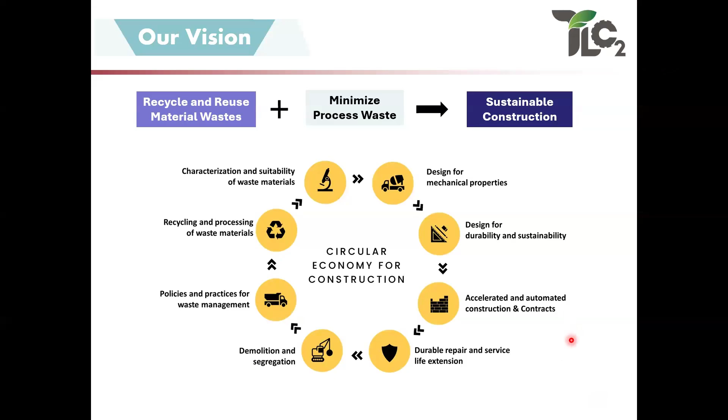How do we- my computer stopped working. Do you see my screen? Yes, but my screen became blank. Show mode. Can you see now? Yes. Hello? Yes, yes, okay. Yes, we can see now.

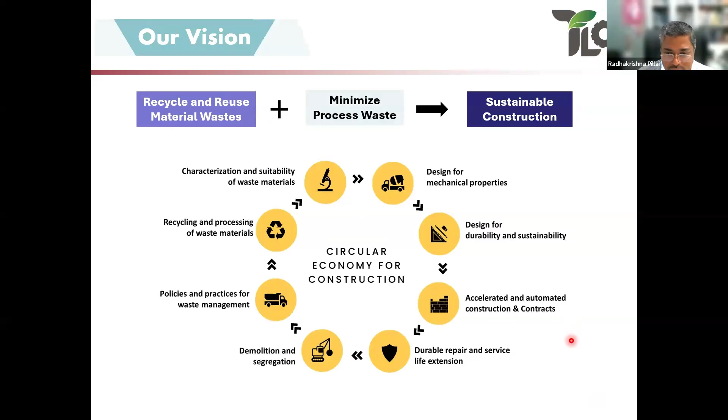Now for today, I just want to brief you on what our Center of Excellence on TLC2 does. We work on materials and management aspects. Today's topic is mainly on looking at how do we build durable concrete structures, or rather, how do we control corrosion in concrete structures.

So I'll be talking about the materials aspect. How do we choose a particular material which will help you in building long-lasting structures? And we will then talk about cover concrete and its properties - what are the key factors which make us worry about cover concrete? And then a concept called Mx-Dy concrete I will talk about.

And then how do we make sure that the water which we use for concreting is good, because that also plays a significant role. And then finally, if time allows, I'll talk about galvanic cathodic protection. So this is the outline for today's talk.

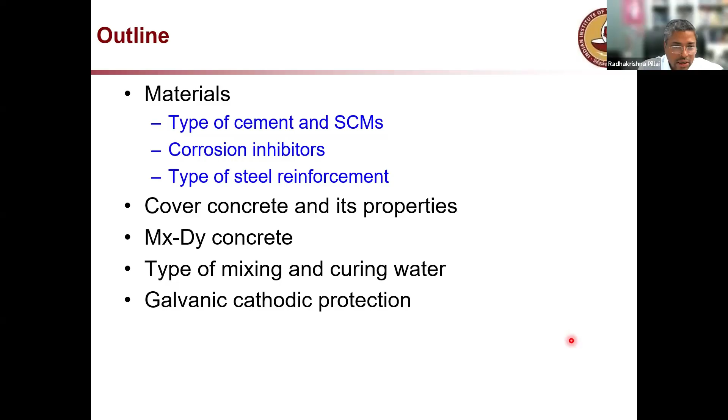Most often we worry a lot about corrosion in concrete structures, mainly because it costs us a lot, and it also makes the structure unsafe after some significant amount of corrosion has happened. So this is something we all are worried about. How much does it really cost? It's about 3 to 5% of the gross domestic product is what the cost of corrosion is estimated to be. Now, out of this, I can confidently say about 50% is because of the deterioration or corrosion of concrete structures.

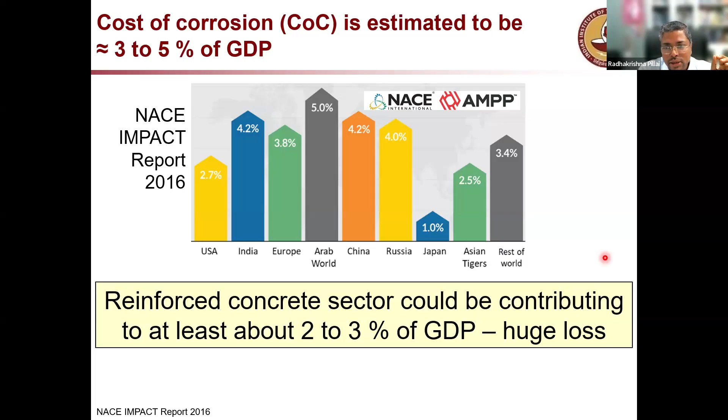Concrete infrastructure plays a significant role, contributing significantly to this cost of corrosion. Now if you look at this graph here, you can see in some places it's more or less around 4%. That is something we have to worry about. And if we can divert or use this money for good construction, it will be really, really helpful. So our objective is to reduce this cost of corrosion to the maximum or minimum level possible, so that we can use that money for other things.

Now, one thing I would like to mention is the importance to be given to material science, or the construction materials aspect, and the construction process or construction technology aspect. Today's lecture will be more on the materials aspect.

And why I'm showing this pie chart here is most structures are designed well in terms of structural design, and probably because of that, we see the gray region on the left side - only about 12% of failure is because of structural design related issues. But what we are seeing is about 40% of failure is because of materials related issues, like concrete - not good quality concrete used, or not good quality steel used, or construction materials quality. So if you can focus a little bit more on the quality of construction materials, we will be able to build better structures.

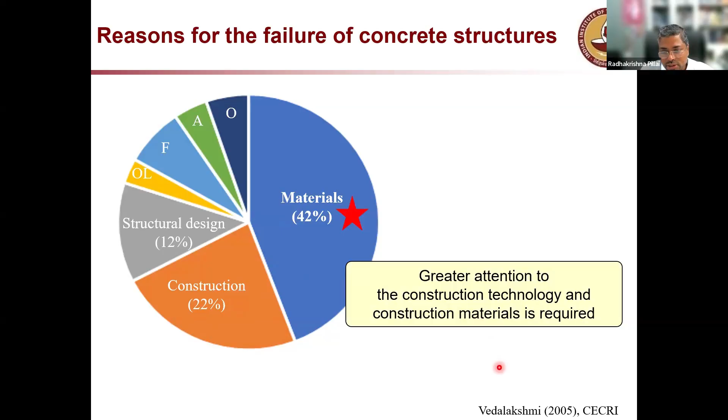But we need to improve our attention towards that. In addition to structural design and analysis, construction is also important, especially for large scale structures. We need to focus on materials and construction aspects. Combining these two accounts for almost 65% of failures, so if we improve materials quality and construction quality, we can really reduce structural failures. Now, when I talk about service life, there are different phases for the service life of concrete structures.

Look at this sketch. Assume this is the cover depth, and this is the reinforcement, the black circle. This blue arrow indicates the movement of chloride ions from the surface, which is the cover concrete. The red circles are moving towards the steel embedded inside the concrete. This is basically diffusion of chlorides.

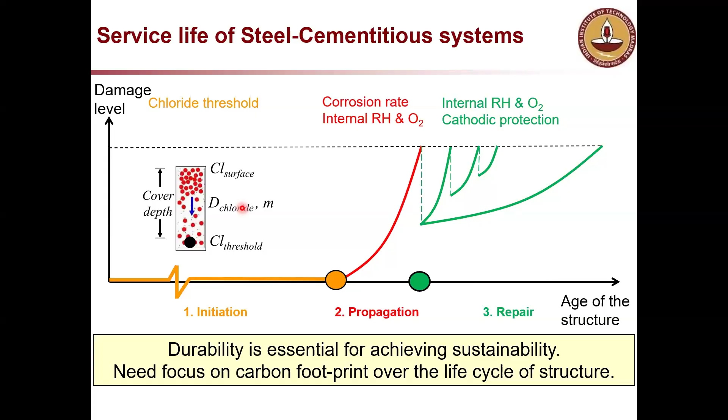If you're talking about a coastal structure, a coastal bridge, or a building near the shore, you have such problems where chlorides come from either the air or the soil. You get chloride attack on the concrete surface, which then slowly penetrates into the concrete and reaches the steel reinforcement. When the chloride reaches the steel reinforcement, it builds up and gets deposited on the steel surface, and when that concentration reaches a value we call the chloride threshold, the steel starts corroding.

So this is the point when the steel starts corroding on the time scale. The horizontal axis here is time, and the vertical axis is the damage level. Until corrosion of the steel starts, you don't see any damage. Corrosion-induced damage is our focus today.

Once the steel starts corroding, within a few years you will see significant cracking, spalling, etc. This dashed line indicates that the damage level has reached a critical level, so you go for a repair, and that reduces the damage level. But then the structure is in the same condition, and if the repair is not done properly, after a few years you will again have to repair the same place. So you keep doing multiple repairs, which costs a lot of money.

Now we have a technology called galvanic cathodic protection, where we can do a repair that will really last 15, 20, 25 years. It's possible - that's what this long green line is showing. I will briefly talk about this cathodic protection in the last stage of this presentation today. So this is essentially what service life of concrete structures means.

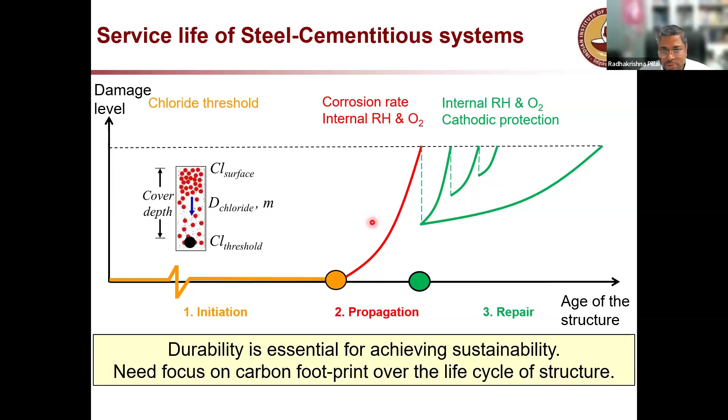There are three phases: initiation, propagation, and repair. The main focus today is on the initiation phase, because that is the longest phase in the life of a structure. So if you're designing something for 100 years or 50 years, you need to make sure that this initiation phase lasts 100 years or 50 years. We don't really consider the propagation period in our design or service life design.

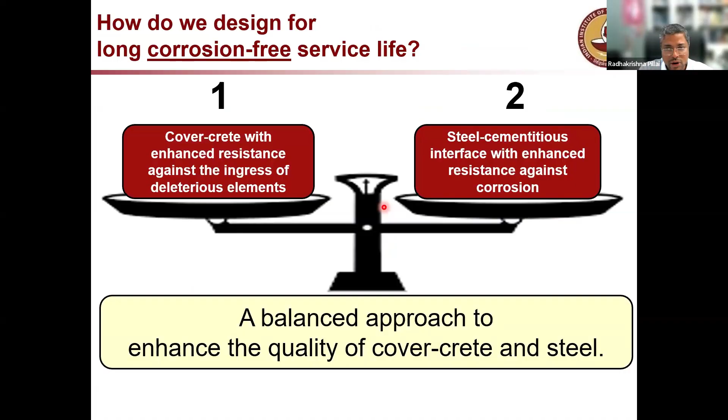Now, to design such a structure, you need to worry about the cover concrete and also the steel-cementitious interface. Both steel and concrete are very important. You have to have a balance of good quality concrete and good quality steel - only then will you get a really long life for the structure.

So for durability, the cover concrete is very, very important, whereas for strength-related aspects, the core concrete or heart-crete is important. We have to make sure the cover is also very, very important. Towards the end, I will talk more about the cover concrete and curing.

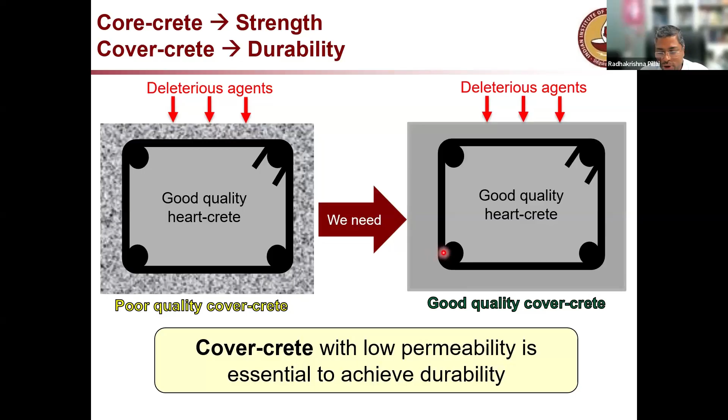To make good quality concrete, we use mineral admixtures, chemical admixtures, and try to minimize the amount of cement. Usually people will say add more cement to make the concrete better, but it is not like that. We have to increase the amount of aggregates, sand, coarse aggregate and fine aggregate in the concrete, and minimize the amount of cement. That will give a better quality concrete.

Now people will say when you minimize the amount of cement, the concrete will not flow properly. So you use chemical admixtures to make the concrete flow. Superplasticizers is one material which is widely used. So the idea is, you have minimal cement in the concrete, and to make it flow, you use chemical admixtures. And to enhance the properties of the cement itself, if you include more materials like fly ash, slag, etc., you get a very good quality concrete.

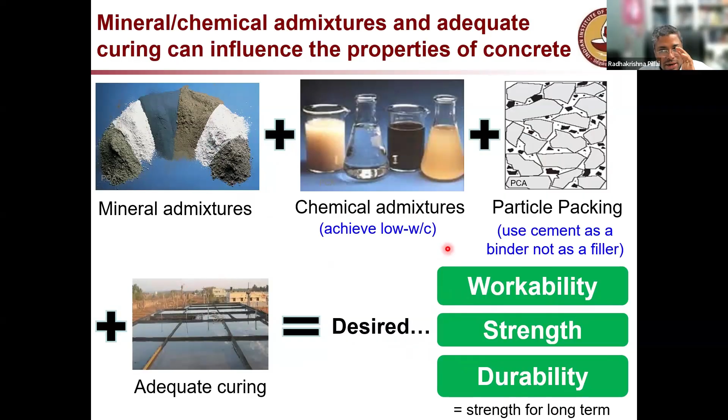Now you might say, if you put all these materials and do not cure the concrete properly, you will not get what you are aiming for. So all these materials plus appropriate and adequate curing is very important. Then you will get desired workability, desired strength, and desired durability. So all three can be achieved if you use good quality materials in appropriate dosage, and also cure the concrete very well.

Today we have a lot of materials available for concrete structures, and now and then you will see different types of steel available, different types of chemical admixtures, different types of cementitious materials, etc. available in the market. Now, if you really want to establish the service life, one parameter is very critical, which is the chloride threshold.

Conventionally or traditionally, we have used 0.4% by weight of binder as the critical chloride threshold, which is the amount of chloride required to initiate corrosion. Now, this number might change as you change the type of concrete which you use, and as you change the type of steel which you use. I'll talk to you about that a bit later.

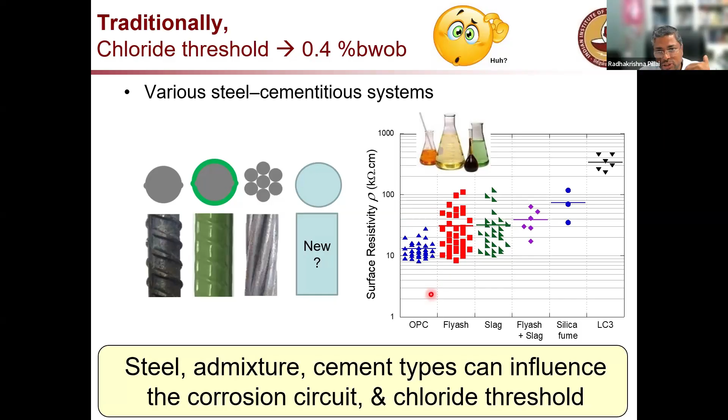Now, when you mix in a little bit of fly ash or slag, etc., you can see there are a lot more numbers in the higher range. In other words, the resistivity of the concrete has significantly increased with the use of fly ash, low water-binder ratio, and superplasticizers. So if you come up with a proper mix design where you optimize the use of supplementary cementitious materials, superplasticizers, etc., you can get a highly resistive concrete, which helps resist the penetration of chlorides, moisture, oxygen, etc. into the concrete, which eventually helps us build durable concrete structures.

Now, I was talking about the chloride threshold. We have done significant study looking at how these different chemical and mineral admixtures or SCMs will influence the chloride threshold, and in particular the chloride threshold of pre-stressed concrete. That is also something which we looked at.

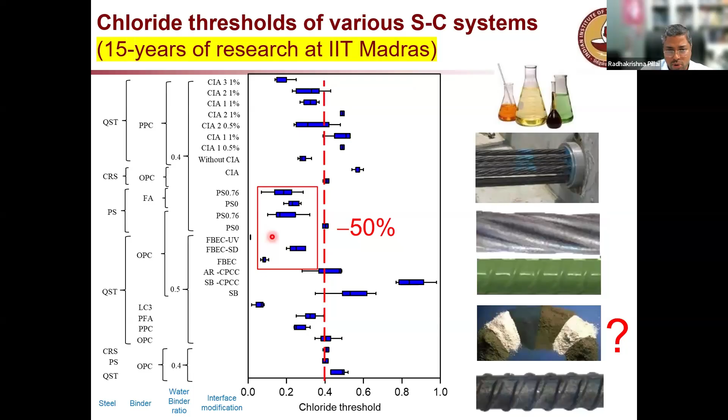Also for rebars which are coated with fusion bonded epoxy material - that green color bar which you might have seen in many construction sites - there is also a significant reduction in the chloride threshold. What it means is such systems could start corrosion at a lower chloride level, which is something one has to look at. Now, if you talk about increasing or enhancing the service life, we have to increase the chloride threshold.

Somehow, one way or the other, we have to increase the chloride threshold. The other way is to reduce the speed by which chloride reaches the steel surface. So two things: reduce the speed by which chloride penetrates through the concrete cover and reaches the steel surface, or increase the amount of chloride required to initiate corrosion of the embedded steel.

One way of increasing the chloride threshold is to use something called corrosion inhibiting admixture. What we have found is this corrosion inhibiting admixture will improve the passive film which is formed on the steel surface. And what is passive film?

Passive film is a very thin layer, the thickness could be just a few angstroms, formed on the steel surface, which protects the steel from further corrosion. Now when you use corrosion inhibitors, that thin layer becomes better, or it can resist more chlorides. So essentially you are increasing the chloride threshold of the steel reinforcement.

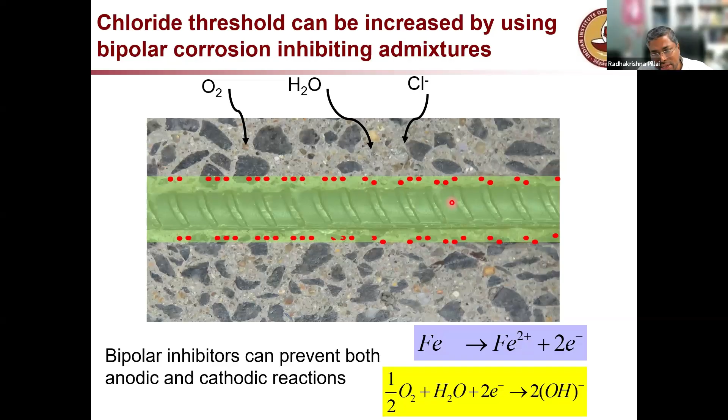Now, how do we put this corrosion inhibitor? It is a chemical which is available. You can buy it in the market, and then you mix that with the concrete and use it.

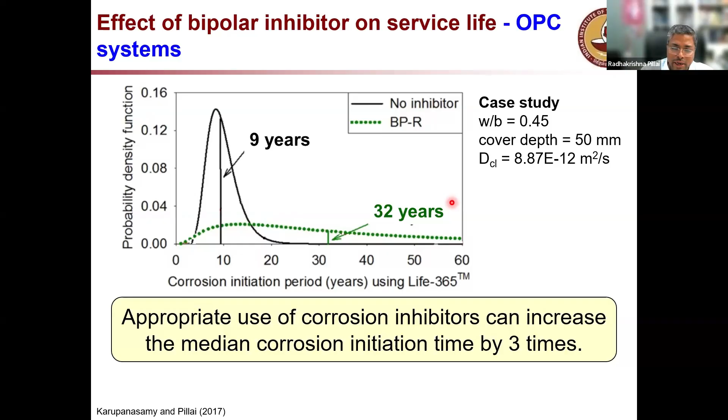This is a study we have done where we clearly found that the use of inhibitors can enhance the chloride threshold, and eventually the effect is increasing the service life by up to 3 times, at least 2 times. So there is definitely a benefit in using corrosion inhibiting admixtures as an integral admixture, mixed with the concrete, helping increase the chloride threshold of the embedded steel. That means the service life can be increased by 2 to 3 times.

Let me skip this particular slide. So this is again corrosion initiation time. You can see the black one here, OPC with no inhibitors, let's say you get about 50 years. This is a parametric study, so don't look at the absolute value on the left side, but look at the percentage increase in service life. Let's say you get 50 years in case 1, the controlled scenario.

Now you put some fly ash in the concrete with no inhibitors, you still get about 90 years of life, almost doubling it. Now if you put fly ash and a little bit of admixtures, you get a little bit more life. In this blue case, with fly ash and corrosion inhibiting admixtures, you get around 120 plus years of life.

So significantly, the message from this slide is that when you use fly ash or slag, those kinds of SCMs, supplementary cementitious materials as we call them, the service life of the structure can significantly increase. Not just by a few percentage, no. You can see here from 50 years I'm able to get up to about 120 plus. So more than double is the point.

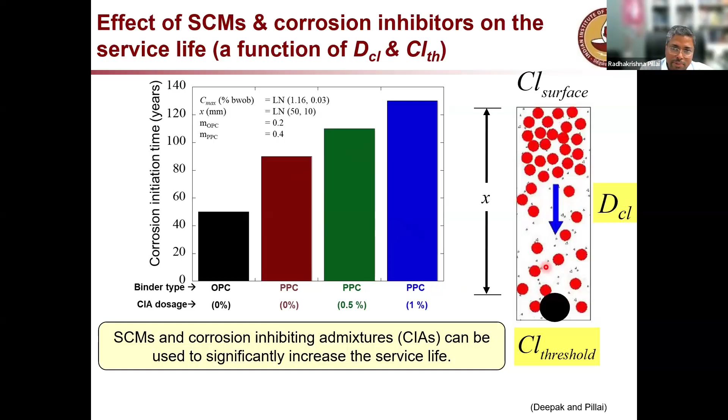So by using the SCMs we are reducing the speed of penetration of chlorides, and by using the inhibitors we are increasing the chloride threshold value. This is a synergistic effect: both parameters work together, the chloride speed is reduced and at the same time the capacity is increased. So then you get really long service life.

How to do that? Now, selection of the reinforcement, how do we select that? This is something happening in many parts of the world, a lot of people are using this kind of epoxy coated bar.

I don't know if this is used in Nigeria, but many parts of the world use such types of rebars. We found that many times the rebars are actually scratched, or the coating on the rebar is mechanically damaged, or when exposed to sunlight, they undergo UV induced damage from ultraviolet rays.

Looking at the world map, you can see this region here has significant, very high UV index. For most parts of the world, you can see that. So where you have high UV index, you may not want to use a polymer-based coating for the rebars, because delays in construction are very common.

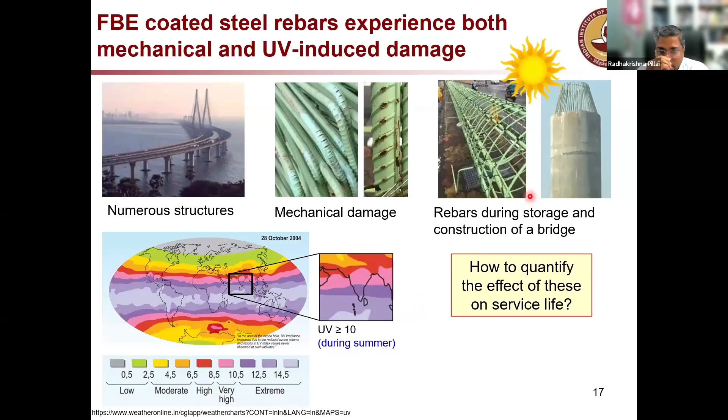How long did it take? We did a study here. We found that within about 10 days, as seen in the second picture, there are a lot of micro cracks. When we expose this epoxy coating to UV radiation, we found a lot of crack formation. That is not good, because once you have a crack like this, moisture, oxygen, etc. can penetrate through and reach the embedded steel surface, causing corrosion. What you're seeing here is the microscopic image of the cracked epoxy coating.

These four images show: Day 0, no cracking. Day 10, a lot of cracking - very fine cracks through which water molecules, oxygen molecules, etc. can penetrate. Day 20, you see a wider crack here.

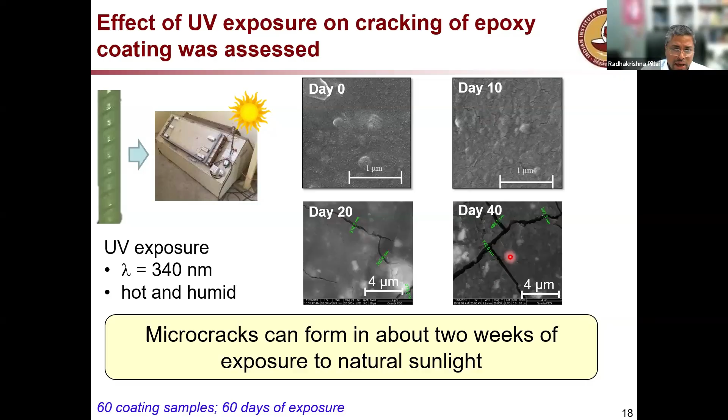So this is telling us that the use of epoxy coated bar should be avoided if you cannot prevent cracking and exposure to sunlight.

What we found quantitatively is that if there is no damage on this bar, a very perfect, pristine epoxy coated bar, then you will get a very long service life, 150 years in one case. But unfortunately, most structures get exposed to scenarios like this.

This is an epoxy coated bar exposed to sunlight. It will definitely have cracks on the coating. And if you have scratch damage, the blue curve here, this also will lead to corrosion starting. It is essentially a crack, a wide crack, so when moisture gets in there, you have chances of crevice corrosion on those rebars.

So essentially the message here is that there could be significant reduction in the anticipated service life if the surface coating is damaged, either through mechanical damage or UV induced damage. If there are cracks or scratches on the epoxy coating, it's better not to use it.

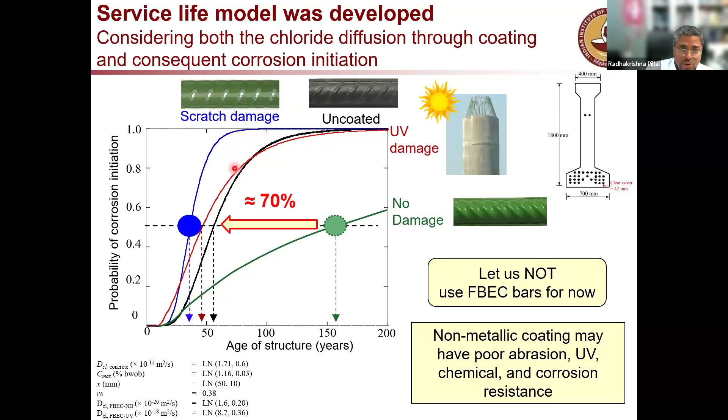Now, another thing coming up in the market is something called continuous galvanized rebars. But before that, this is the galvanized steel on the left side, known for its corrosion resistance and all that. Unfortunately, it is not much used in the market because of cost factors.

This is because of the thick galvanized zinc layer which you have here. As you see, this is the steel part in a galvanized bar, batch galvanized rebar (BGR), and this is the galvanized coating or zinc layer, a mixture of zinc and iron. Now, the point here is this is very costly.

So now the industry is coming up with a new product called continuous galvanized rebar. Only about 4 or 5 countries in the world are making it today, but I am sure this is going to be the future. You can see a thinner layer of galvanization or zinc, which actually gives excellent ductility, good abrasion resistance, and a very good metallic bond with the substrate steel. On top of all that, because of the zinc, it has very good corrosion resistance. This is a new thing coming up.

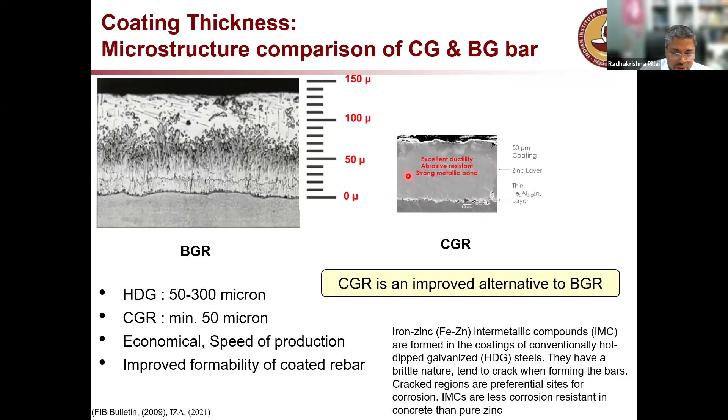What is the advantage of this? If you go with galvanized steel, there is a possibility that the service life of the structure can increase by 2 to 3 times. I mean, if not service life directly, at least the chloride threshold will be significantly higher, 2 to 3 times, and an associated service life increase is possible.

So you can see here, if an uncoated steel is used, the red curve here, you get about 25 years of service life. If you use galvanized steel, there is a possibility of getting a service life of 50 to 85 years.

That's very useful. Now, one message I want to tell you: when you talk about coating for reinforcement, don't only look for a coating that gives very good abrasion resistance, because at a construction site we don't treat rebars like babies. We throw the rebar, we drag it, we walk over it, we run vehicles over it, all sorts of rough handling happens. So we should make sure the coating doesn't get abraded or mechanically damaged. On top of that, it should also be UV resistant, and it should have very good resistance against the chemical nature of the cement or concrete itself. So all these have to be considered.

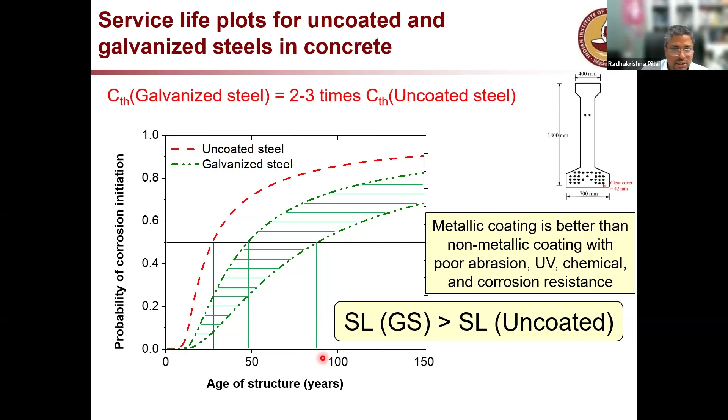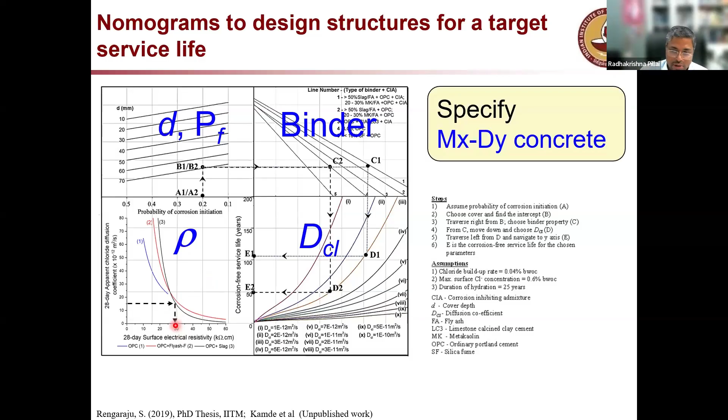I say, for example, in this case, I'm saying 30 is my target electrical resistivity. Then my concrete will be good. Engineers can do this test on a cube, or even on a structure, and find out what the resistivity is. So every concrete compressive strength specimen, when you do testing, you also do a resistivity test on that specimen. This should be a wet resistivity test, done when the concrete is wet, not dry, because when the concrete is dry you will get very high numbers anyway. So the idea is wet resistivity of the specimens.

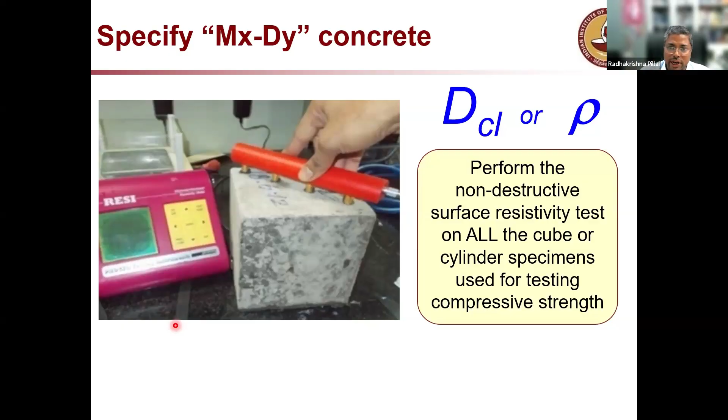Now, when you do this, you can say my concrete is MxDy. M stands for the mechanical property and D stands for the durability property. Resistivity is a representative parameter for ensuring good durability.

So we have implemented this in one of the projects here. You can see the bridge on the left side where the outer two spans were done with M40 concrete.

Yes, so here in India we say M40 for 40 MPa characteristic strength. In the middle span, when the project started, by the time they constructed the middle span, we were able to convince the authority that they had to go for durable concrete. And we were successful in convincing them and making this PSC or slag-based concrete for this.

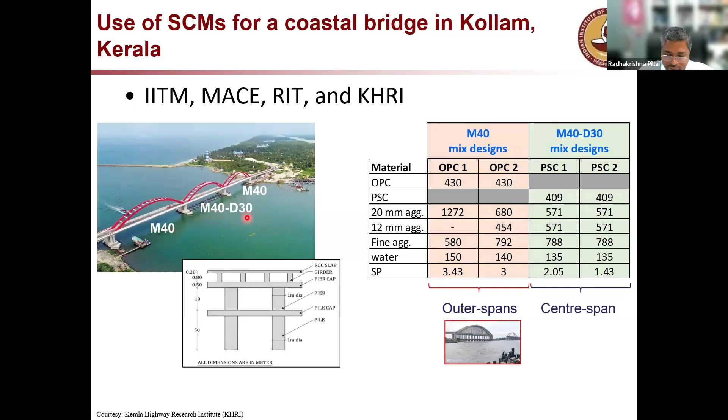And this is the mix design over here. So we tried four mix designs and proved that the slag concrete with D30 -- that is, 30 is the minimum resistivity for that concrete -- proved that it is possible.

We did a lot of testing on the field, on the actual bridge elements. We took cores from the bridge element -- this is actually the approach road for the bridge. We took samples from the field cast concrete, and what we found is when you go for slag concrete, you are able to get 125 years as the service life, whereas in the OPC concrete it was coming to be 31 years.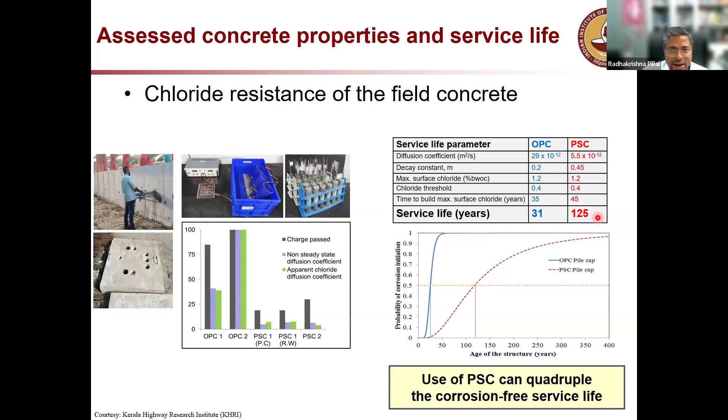So you are able to get very, very long service life. That means this 125 years -- let's forget the exact calculation -- at least we'll get 100 years of life where you don't have to worry about corrosion. So this is something I would like to emphasize: use of supplementary cementitious materials really, really enhances the life of concrete structures.

Now, another thing which we often neglect is the cover depth, which I believe is probably the most important thing one should worry about. See, the advantage of having a good cover in a concrete structure.

Look at this box on the right side in this study: 30 mm cover, let's say you get 20 years life. 40 mm cover, you get 32 years life. 50 mm cover, you get 46 years. So the thumb rule is for every 10 mm, you can get about 65% increase in the service life. But it doesn't mean we can keep increasing the cover, because the concrete will crack. So you have to optimally design that.

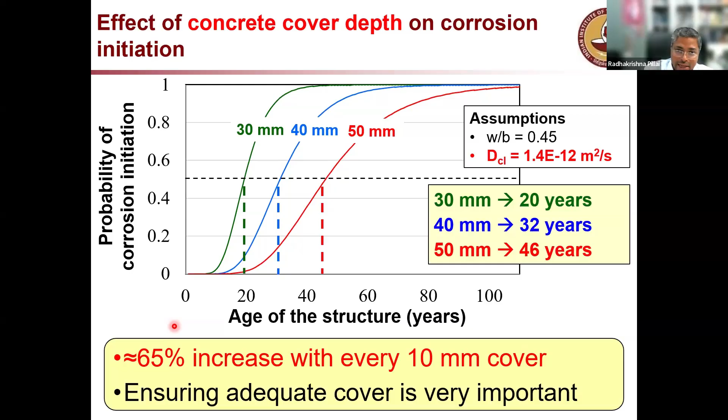Now, the point I'm trying to make is whatever is specified, make sure it is actually achieved on site. Here is an example where cover was not very good -- what you're seeing here is a concrete column in an apartment building. When we removed the plaster from here, we found that the concrete cover is good on one side and very, very little on the other. In the close-up, this region is shown, where you can see 2 inches of plaster material on one side.

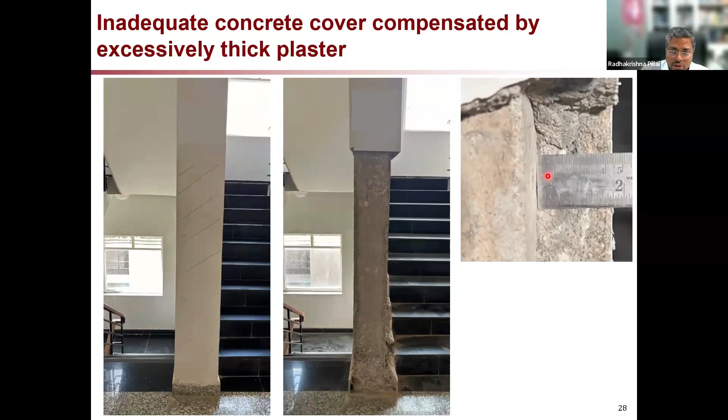That means on the other side of the same column, it will be much less. So there is a significant variation in the cover. Cover depth is not adequately provided in many, many cases, and this leads to significant corrosion, early corrosion issues.

So here, when we opened it up, you could see a lot of cracking, this hairline crack, very, very fine cracks. But when you opened up, you could see the significant corrosion here. So this is the same column.

When you open the column on one side, it looks like this. You go to the right side, like near the staircase here. You look from the right side, you can see very hairline cracks here. And then when we opened this plaster, this shaded region here, we opened it up and then you could see that significant corrosion.

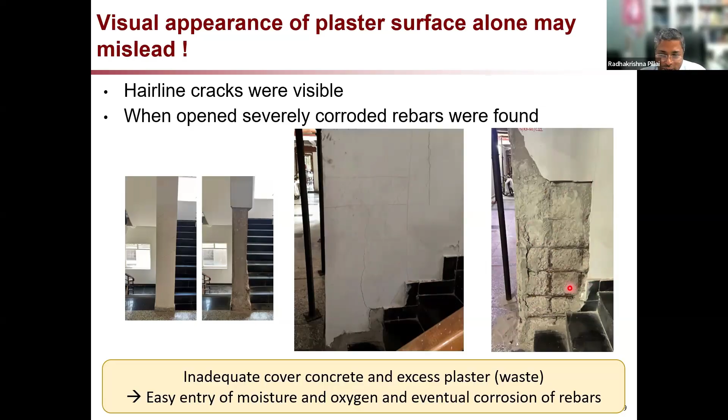Where is this? Why is this corroding here? Because you remember, in an apartment complex, people will mop or keep the area clean. So every day you will provide water. Now that water, through capillary rise, is reaching to about 1 meter height, and you can see very clear corrosion. So cover is very, very important.

The quality of the cover is extremely important. Now, people might say that all the mistakes in the cover are covered up by putting proper plaster. This is a photograph to show you that plaster has no role in preventing or enhancing durability. It's just a cosmetic cover, only cosmetic.

You see here, in 8 years, in one of the structures where we visited, we found this is the plaster region. This was tested in 8 years because the corrosion already happened 8 years after construction. So we went there, inspected, and found that the concrete was very good quality, but the cover was not adequate.

And the plaster is completely carbonated. This is a phenolphthalein test, so plaster really doesn't resist anything, it just carbonates very, very fast.

So the message I would request is, try to avoid plastering if at all possible, because then you will ensure that the concrete is of good quality. And when the concrete is of good quality and adequate thick concrete cover is provided, then your structure will really last.

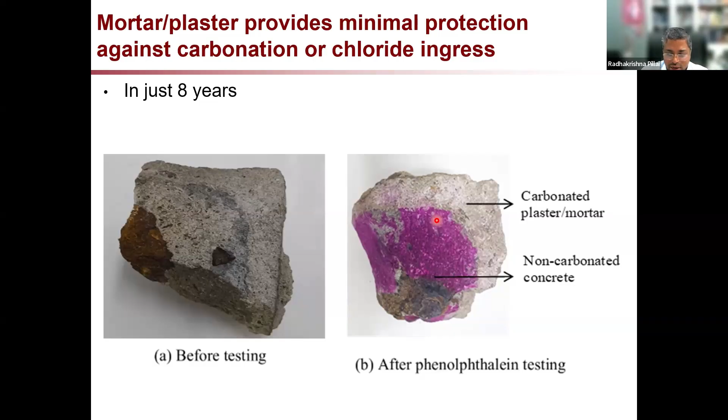Now, how do we ensure that this good quality cover is provided? Usually, I've seen many places where plastic cover blocks are used. My suggestion is not to use that.

Because these plastic cover blocks, when the concrete starts shrinking, it might open up over there where the plastic is, and then you have a direct pathway from outside towards the steel through which water, oxygen, etc. can penetrate. Also, there are cover blocks in the market which look very smooth, so you may not have proper bonding with the surrounding concrete. Cover has to bond well with the surrounding concrete. That is why even plastic may not be very good.

So now we are recommending cover blocks which look like this, where you can put this circular disc. We should call it disc, not cover block, but cover disc. Cover disc we can provide, and these are indicating the disc. If you are talking about a column, provide the disc on the stirrups, the horizontal or lateral reinforcement, not the longitudinal reinforcement. So provide this cover block on the exterior or outermost steel reinforcement.

I think it's understandable. This is the cover block. These blue things here are the cover block. These are the shear stirrups, you provide it on them. The advantage of having this disc with the hole in the center is that it cannot be misplaced. When you have cover blocks like this, even if you tie them very well, they could be misplaced.

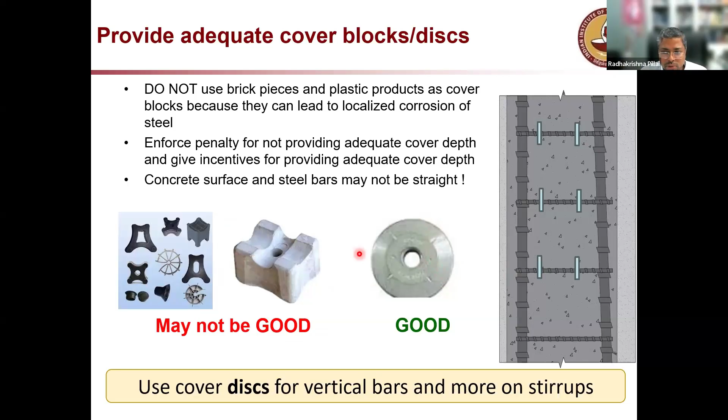Now, cover is something very, very important, so we have to ensure that the concrete cover is very good and of very good quality. This is a bridge which was just built 20 years ago, and it was repaired once in 10 years and then again ready for the next repair. So this is something which we have to really avoid. If the cover is very good, you will not have this kind of problem.

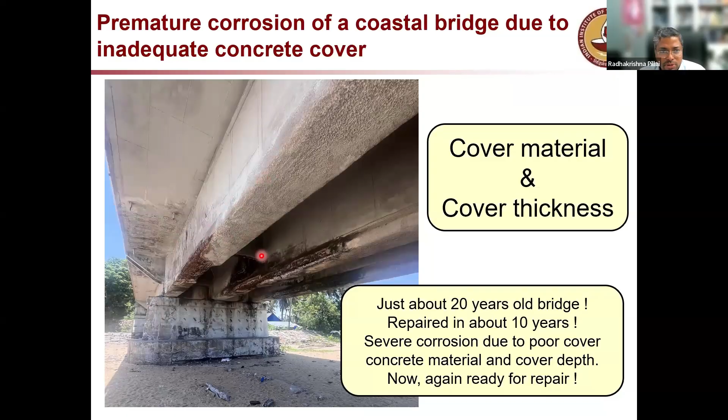So what type of water should we use? Make sure that the water is potable. Use the same water which you can drink for the concrete, if at all possible. If it is not possible, make sure that the water is treated well so that the chloride content and sulfate content is very limited in the water.

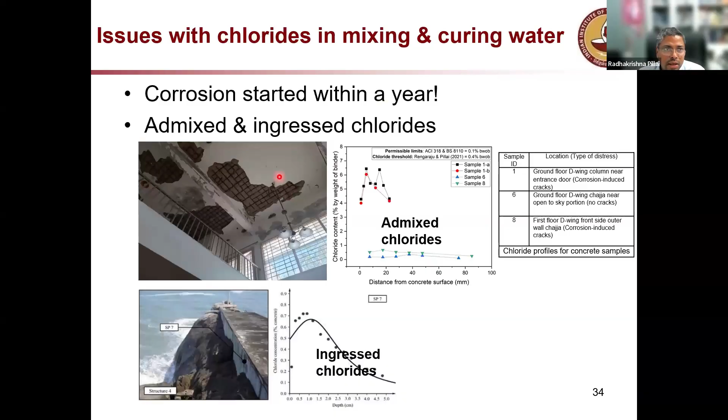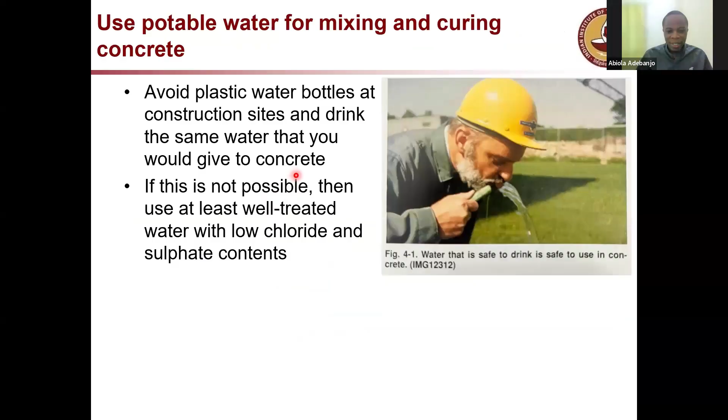All right, thank you so much, Prof. It's been an engaging session with you. I have more stuff, but I can cover that later. I wish you could go on and on. I've picked up a lot of lessons from your presentation, and one that stands out for me is that we should give to concrete the water that we want to drink. Thank you so much for that.

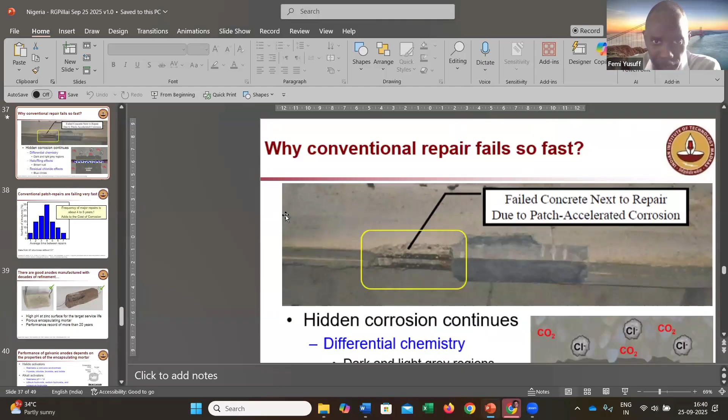See, if you want 20 years of life, by putting coatings and all that, you may find it very difficult. So interventions might be required. So one technology which is very good, or at least I believe in that, is this cathodic protection. And this is a beam which you see here.

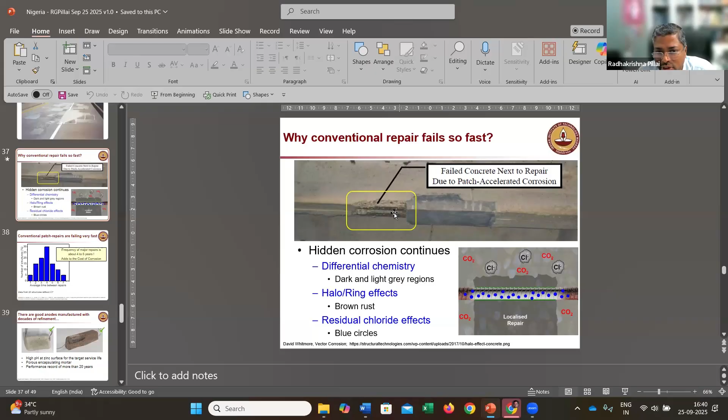When you repair without cathodic protection, you create corrosion on the region which is not repaired. The adjacent region starts corroding. Then you have these types of anodes which are available in the market.

If you need more help, we can talk separately. I can help you with that. As the project progresses, if I need support, I'll leave it to you. Kolawala knows how to reach me, you can talk to him and then we'll talk. Thank you so much, thank you, Prof.

So this one is not just a zinc piece. It's a special material which has very high pH, and it should last for 20-25 years. It should also be able to accommodate the zinc rust. So it's not like you take a zinc piece and put concrete around it and it will work. I'm saying that because there are products in the market which are like that.

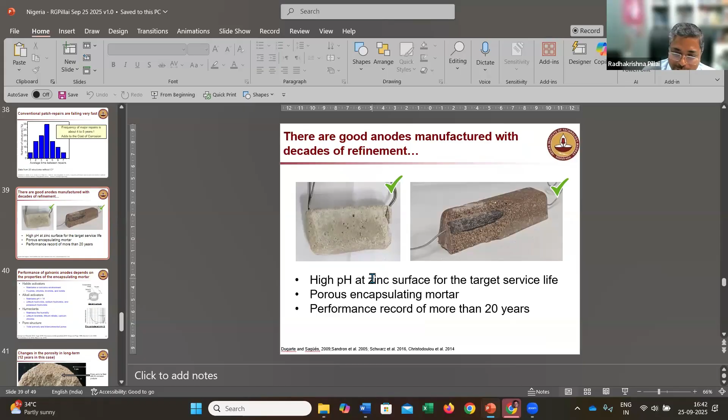So if you look at my slide, the third bullet says performance record of more than 20 years. That's the number you're asking for. Yes, that's what I'm looking for.

Thank you. So if you look at a close-up, you can see it's like this - very porous material, no sand. This is the zinc piece, and it's very porous, like a spongy type material.

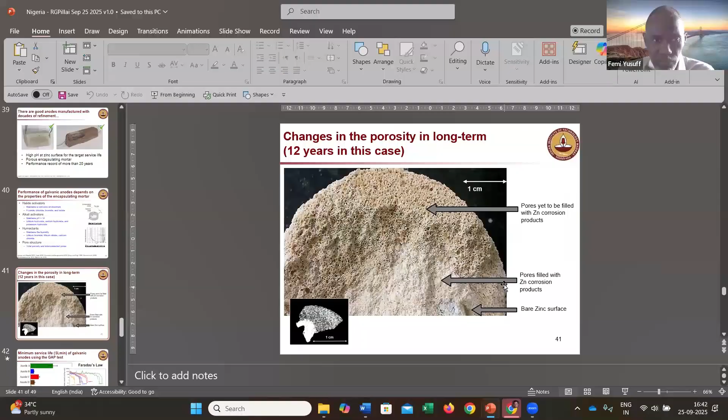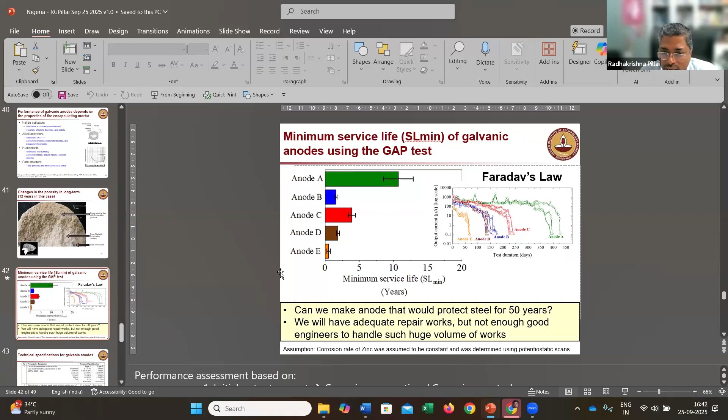And then when we did some laboratory studies on that, we found that different anodes available in the market are showing different life. So then we came up with a question: how do I decide what to use? So we call it the GAP test.

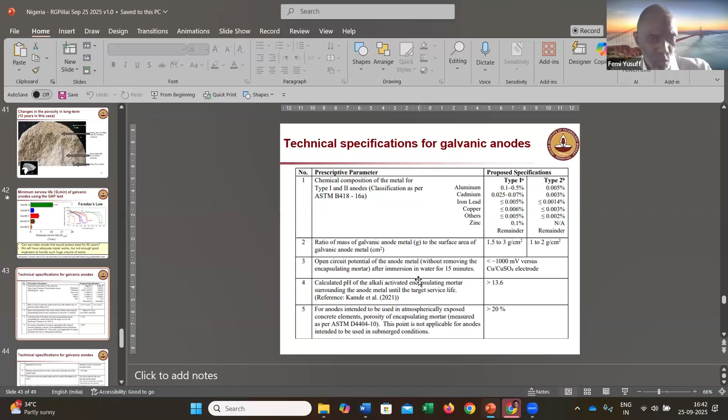And then we have made specifications. You can use this specification, and we can give you the anodes also, and that will give you good life. And with respect to money, if you go with this galvanic anode, you can really get 70% or more savings in money.

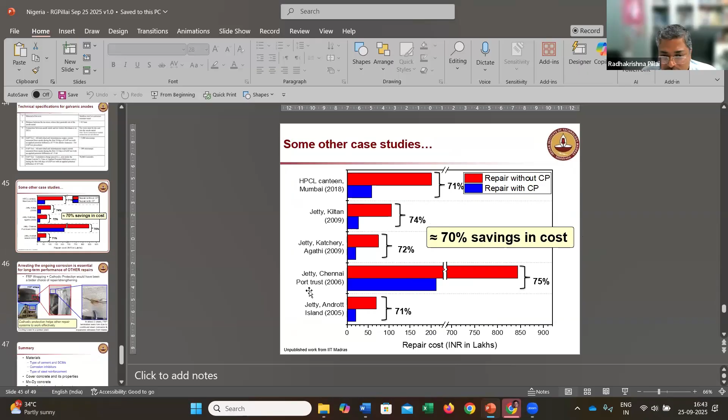Thank you so much. So let me allow the others to have a separate discussion if you want, to let me allow the others who have questions as well. Thank you, thank you so much. I think we might have a part 2 of this with the way things are going actually.

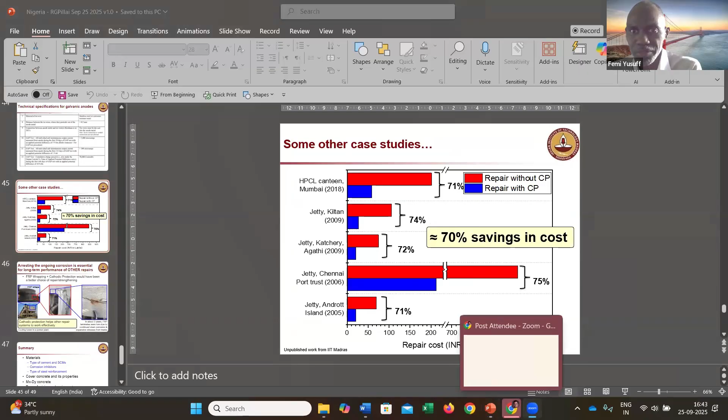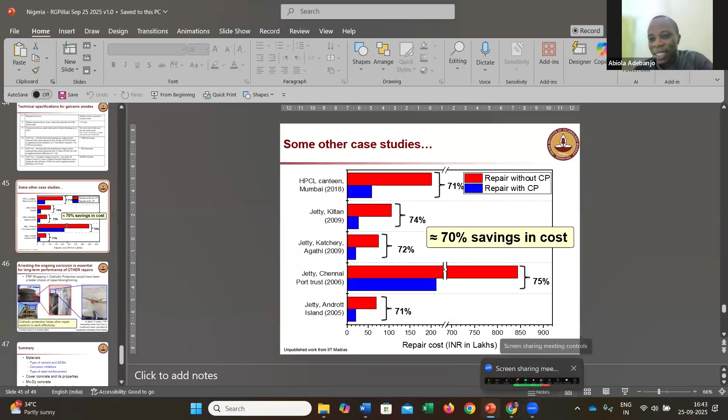Okay, Dr. Shola George, your question please, try to make it as prompt as possible. Dr. Shola George, are you still there? Okay, let me move on. Dr. Shola George actually has another meeting in 2 minutes, so I think maybe we should just move on. All right, Dr. Akinda Onsi, are you there? Maybe we'll just make that the last one.

Good afternoon, everybody. Yes, afternoon, sir. I want to appreciate the presenter, our speaker. We appreciate your presentation, a very nice one. I want to ask maybe about 1 or 2 questions.

If you have a reinforcement that is already corroded, you can see it is no more useful. How can we connect it again - we're talking of retrofitting now. How can we retrofit to connect reinforcement to it, especially if we have to use carbon fibers? I don't know whether you discussed that.

No, I did not talk about that. I'm only thinking, is it possible to use carbon to connect? And if we have to use reinforcement, what will be the best method of connection, especially because both ends of it are corroded and they are gone? What can we do to retrofit in that type of situation?

I would say if the rebar is severely corroded and gone, you should put additional reinforcement. You could put additional reinforcement. What I'm saying is, how do we connect? I'm only looking at especially the connection points now. Some of these things, if you could share a photograph or something, it would be easier to answer.